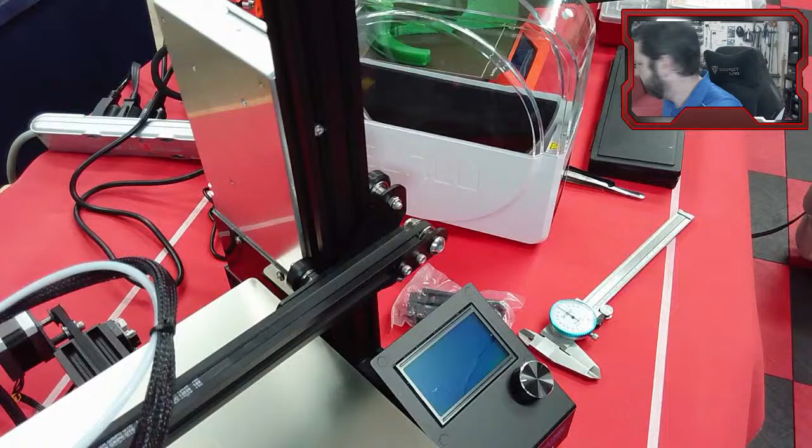So let's back up a little bit, get that off the screen. Here's the violin. So I've put some fasteners in it, put a few pieces together. Still have another piece to print. Actually, there's two other pieces to print to it. We did have a part failure in the print. I saved it. Well, I don't know that I've saved it yet, but I glued it back together. So this piece right here, it starts here and it actually ends here. So all of that is printed as one piece.

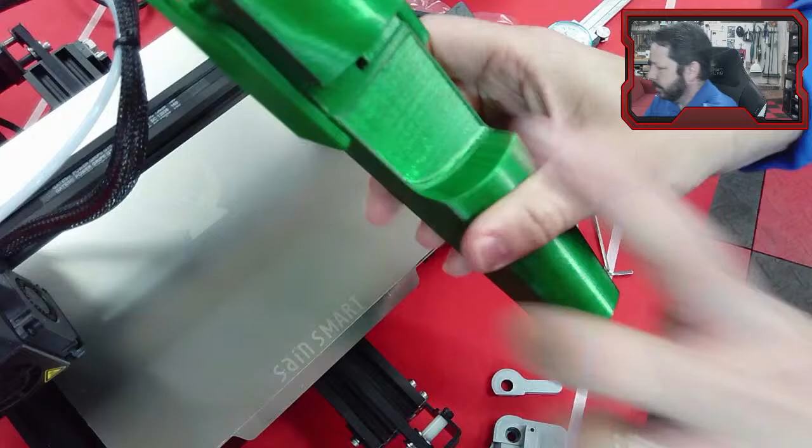The problem with this comes from the way I printed it. I printed it standing on this end, upright like this. On some printers that would have been no big deal, but on the ones I printed on, the bed that it's standing on moves back and forth to create the y-axis. Other printers, all of that motion X and Y is handled by moving the print head back and forth, and the bed just drops down to create the z-axis. So that's a different mechanism altogether.

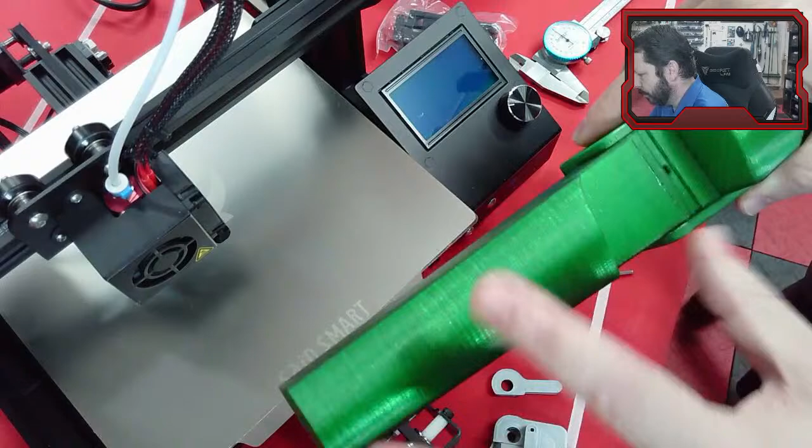But when you put a really tall, relatively heavy part, these aren't light, they have 4 walls and I think only 20%, but they end up relatively heavy. When you print that standing on its end, as this bed moves back and forth, that column gets taller and taller. And it starts shaking a little bit at the top, and eventually you'll get the nozzle catch on something that it printed. So here it actually caught on, it's buried inside here right now, but there's one of these slots where you put a nut. I'll show you that later on today.

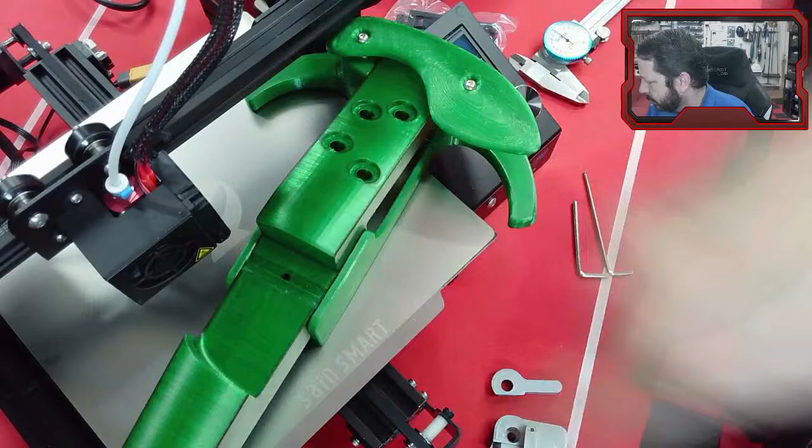Where you put a nut in here to bolt things together, it caught on the edge of making the roof of one of these things, and it was just enough to break the whole thing off. It just landed on the bed while the extruder tried to print the rest in midair, so it didn't work. What I did to fix that, well, we'll see if it fixes it. I may have to reprint the whole part, but there are screws that hold it together this way, and it's screwed down to this bottom plate, so maybe it's good enough. It's going to be in compression when we put the strings on it. The strings are going to try to pull everything together. So I'm actually more worried about bending on the back side, but we'll see.

Anyway, what I did is I reprinted just this top part, the part that tried to print in midair. The whole thing was a 12-hour print, so I didn't want to start it all over again. And then I glued it back together. You can see the seam right there. I didn't try to hide the seam because I don't know that it's going to work. If it does work, then I'll come back and try to sand this out and smooth it up a little bit. But how you can do this, I think I already showed it, in Prusa Slicer you can actually split a part into two or multiple pieces.

In this case, I was just splitting it into the part I'd already printed and the part I hadn't printed. So what I did is I resliced the part, and in this case I had a really good marker because it failed right at the top of one of these little holes where the captured nuts go.

And so I could find that layer in the slice, and it gives me a layer number, 798 or whatever it was. And I just sliced the part at that layer and was left with this little piece and the piece I'd already printed. And I just threw away that part and printed this part and then glued them together.

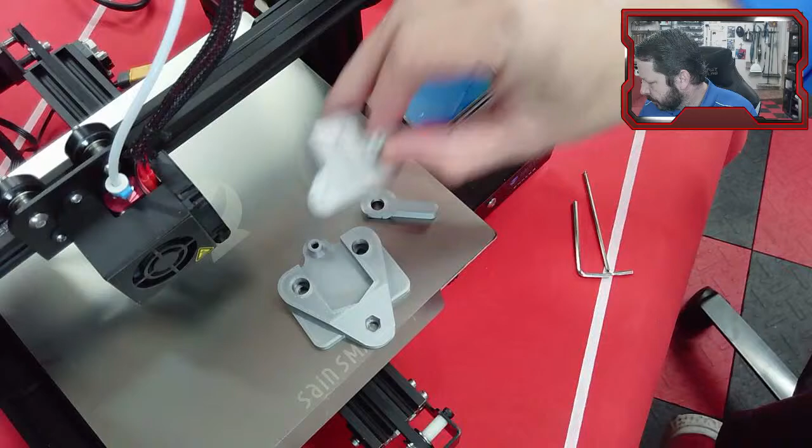This is a swappable carriage, so I'll have to take this part off and it'll mount in that place. This is the plate that puts the hot end and the fan shroud and all that on here, and it'll mount there, and there's a little lever here. I need to show you something about this one because it's not quite right yet, but this little lever cams over and locks it in place, and then you can print, or you can switch other things out here.

So I'm going to put one of these plates with the right shape in here, but it'll mount a pen so that you can have a plotter, and another one where it can mount a little tiny DC motor for very light CNC milling type stuff.

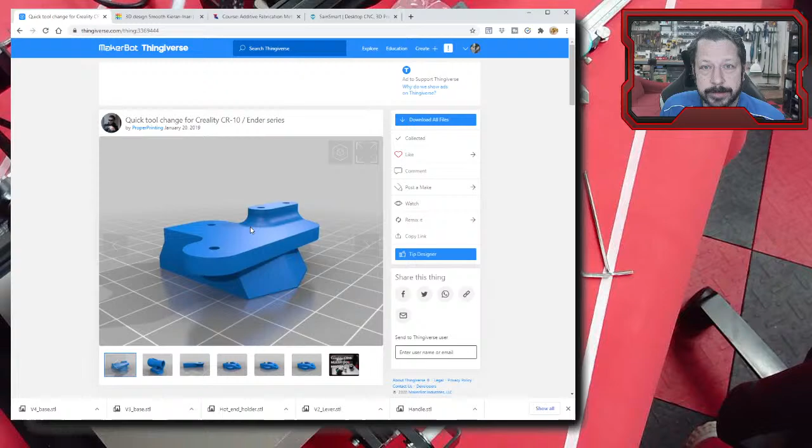I'll show you where I got this one. This one is from Thingiverse, but you can get it other places. This is it right here from Proper Printing. He has a YouTube channel where he does all kinds of stuff. He made an Ender 3, but it's foldable, so it folds down into a little briefcase looking thing. And he's got a lot of different interesting things, but this is where the design came from.

I have one on another printer, and they work surprisingly well. Even PLA, you'd think that PLA being that close to the hot end would not survive, but it's actually not close to the hot part of the hot end, so it actually works okay. But he's got several different pieces.

There's the main plate. There it is with a Dremel-like tool on it. Just different prints of it. He's got a laser mount. Oh, I have one of these lasers. I might could mount a little laser on there too. Didn't really think about that. But there it is in place back there in the back, the white piece.

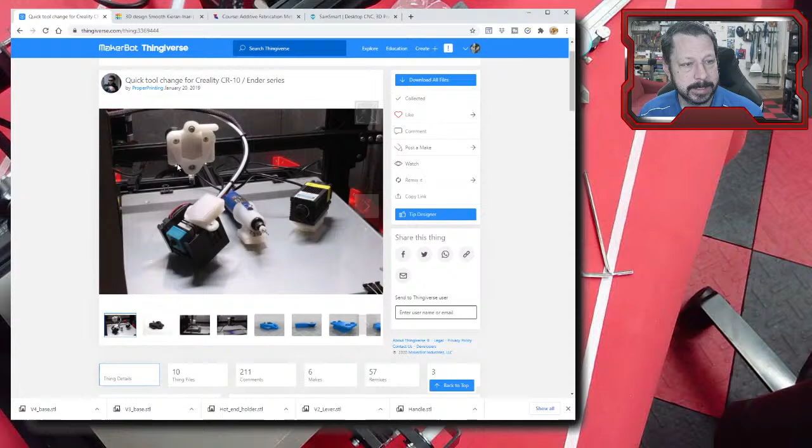So it's going to offset this thing a little bit, so I have to reset where the y-axis home's at. But that's just a matter of moving the little limit switch back here to reset where 0 is on the Y corner. What I was going to show you about this lever is that it doesn't work quite correctly, and it's because of the way I printed it.

So the idea would be that it would go this way. It would cam over, and I don't want to do it right now because I don't have the screw in here to actually help out holding this thing, and so I'm pretty sure it would just shear this little stem off of here if I cammed it over. But what the problem is, and I don't know if you'll even be able to see. Let's see if we can get it to focus on this part. Maybe it's going to focus on everything but that part because it's so tiny.

It was printed on the bed this way, and right at the bottom here, you can see that it's a little bit thicker here than where the main part of this cam exists. That's usually called elephant's foot, where the bottom of a print is a little bit wider than it should be. When you're printing those first few layers, you're printing usually slower, maybe even hotter. Your layer cooling fan for PLA is not on, so it's a little bit gooier, because you do want it to stick to the bed.

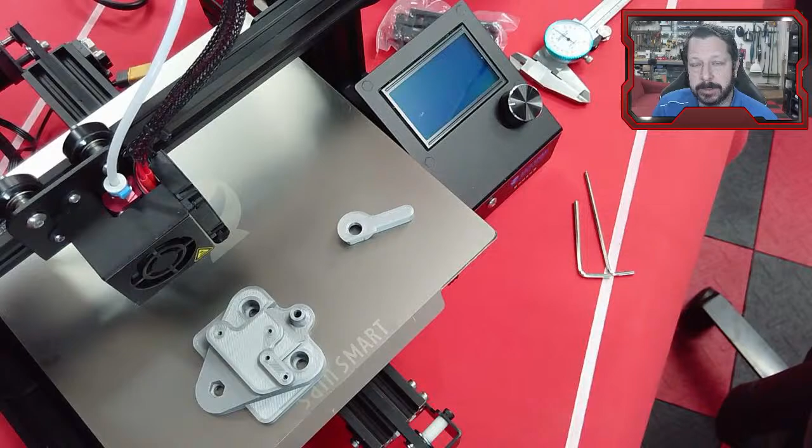I don't know if he's released the files to modify these things. No, he does have one file that you can modify. You can modify STL files, but it's not as easy because an STL file is all the geometry just described in triangles. So it's not like a SolidWorks file where you have all of this information about this was created by an extrude, or this was an actual arc. It's just triangles that make up the outer surface. So they're a little bit harder to modify.

Another thing you can do is in the slicer itself. So there's a thing called horizontal expansion.

And so if the holes are coming out too small or too big or whatever, you can modify this horizontal expansion to make holes larger or smaller; that's usually what you're doing with that. But there's also a horizontal expansion for the first layer. So you can just shrink down that first layer by 1% or however much you think you need to shrink it down by.

I think that's what I'm going to try when I reprint this, in order to get that elephant's foot gone. Of course, you could just go in there and try to file it down, sand it down to where it fits. I might try that too. Another thing I could do is try printing it this way, where the elephant's foot is on this surface, which would be much easier for me to file if it gets in the way. I actually don't think it would get in the way.

But those are things that you have to take into account when you're printing something: when it becomes a real thing, it exists in the world, the way you created it might affect how it actually works. In this case, it makes it not work. What else do I want to show?

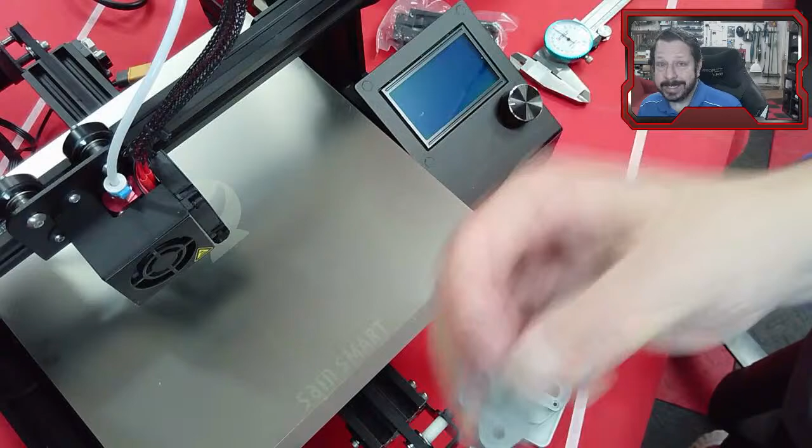Now, if you're printing something that doesn't have these tiny little peaks, then okay, no sense in worrying about it, if all you're printing is bigger areas like this. I did go in the G-code itself to see if the retraction was changing, and it does show a change in the retraction in the code itself for these files, but the results don't show any difference at all. With these, I can clearly see a change when I modify a variable.

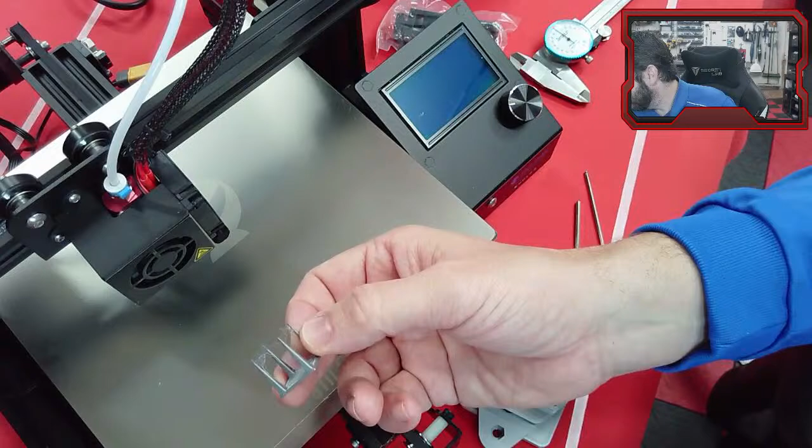So I kind of still like these, even though you can really only test one thing at a time. But I don't know, I still kind of like these so far.

Maybe I'll find a reason that I'll like these, but right now I still like these. As far as when you're doing this for an assignment, it doesn't matter what you do. Just do something, print one, make a change, print another one, and report that, hey, I changed this and this happened. So it doesn't matter which one you use, although I do kind of like the smaller one for actually visually seeing that something's changing.

What else? Oh, all right. Now a lot of your printers, if you have the Pros or the version 2s, they have a little piece of hardware here that lets you tension this belt easier. So the way that this printer tensions this belt is you loosen these and you pry this over and tighten them back down. And there can even be a similar thing on this axis also, where you loosen these and pull it out, and that's how you tighten the belt.

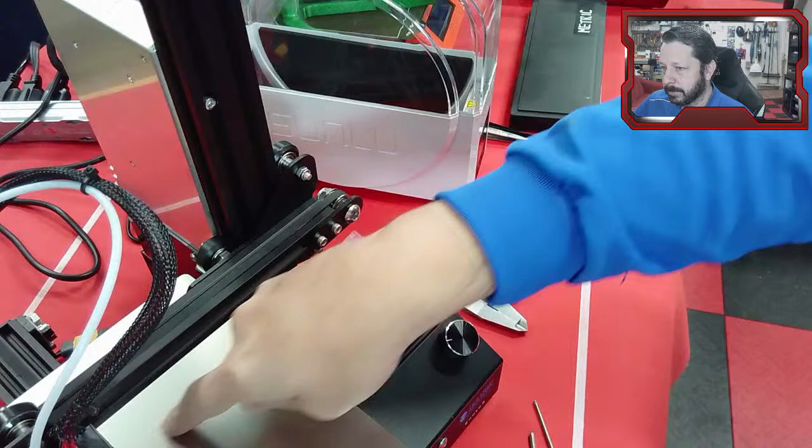Now this belt's actually pretty tight. But when I ordered this sheet, the PEI bed sheet here, right there, when I ordered that, I also ordered a little end here that is adjustable. So these came from Sainsmart. No particular reason I ordered from there, except I was already ordering other things from there. So they do have accessories, and let's see if I can find them in here. I've ordered some of these other things too that we'll look at in the future.

It looks like they have their own version of the filament drying box. Oh, I will mention something about this one. This box, it does seem to work. I did try to get a bad roll of filament so that I could dry it out and see if it worked. The way it works is basically there's a heater in here that acts like a really low temp oven to evaporate out the moisture, which is the same thing that you do a lot of times in a food dehydrator or in a toaster or something like that. They've just built it into this.

The issue I had with it is I did have an old roll of filament, but it's an old roll that I don't even know if they make this style spool anymore, but it's a really wide spool. So it's not this spool, but it's really wide, and it doesn't fit in the little cavity here. So that's the only issue I've had with this particular thing, is that I do have some spools of filament that don't fit in there. I don't even know if they really make that form factor anymore, but if for some reason you're using a spool of filament that's excessively wide, it's not going to fit in the box to even begin to dry.

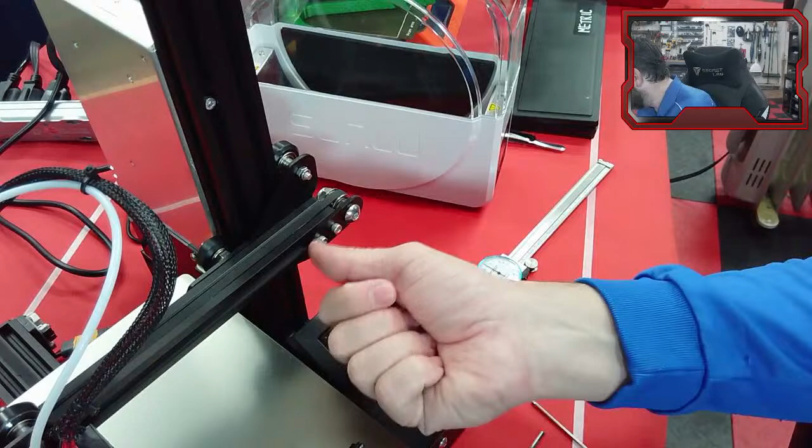Anyway, this thing, I wanted to show you, if you have a printer that doesn't have this, for $13, you can mount this little guy on here. And it does come with hardware, although there's hardware here, so I don't know if you would need to change out the hardware or not. It actually looks like you could just use what was already there.

If you don't want to buy anything and you have filament, you can print these. For most printers that have this size, the 20 by 20 extruded aluminum, on Thingiverse they have printable versions of this, screw and everything. You just use the old hardware that was on the old piece, put it on the printed version, and then you have a little knob here that you can use to tension the belt. For both axes, they have those for most printers. I haven't actually printed one of those, but you could do that.

So what you would do, hopefully it's not too terribly difficult. So we loosen it up. Got to get the belt off of here. I do remember it being a little bit tricky to get this belt on here, but there we go. Now, this one, the belt could just come around here. This one, I actually have to feed the belt in here. Also, this one has a grooved pulley versus this one just had two bearings back to back. So I don't know if that will help us keep the belt. We didn't really have slipping problems on this to begin with, but now we certainly won't, at least not there.

So let's see if we can get this. Okay, it's going to mount that way. Let's see, what hardware do we want to use? I'd rather just use the hardware that came on it, but it is a little bit thicker plate, so I'm going to use the hardware that came with the belt tensioner. This is always a tricky part, getting these. It might be simpler to do this. Put them on and then slide them in there. I keep forgetting that I don't know where the camera's looking all the time. So there's that. Where'd my other one go?

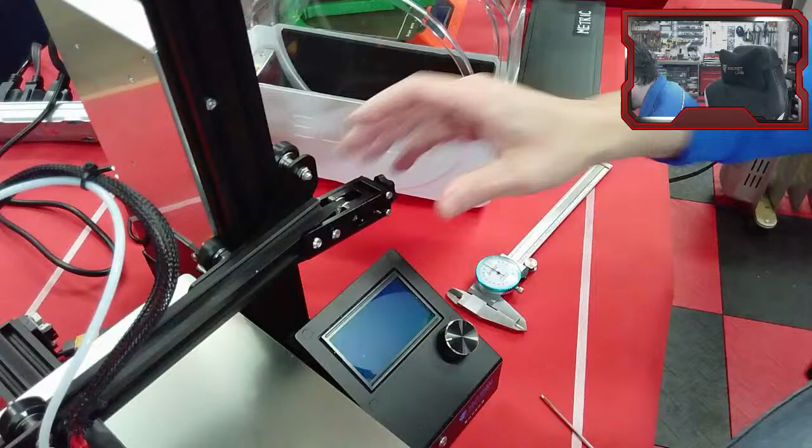Now these little inserts, you can tighten them up and they don't actually catch. So you do have to be careful that they catch in the groove there and they don't end up tightened where they will just slide out. So I generally try to spin it pretty fast to get them to swing up there in place, which they did. So far this has been pretty easy, ooh, look at that. Don't need to get that out of whack.

All right, and then we can just tighten the belt by turning this knob here until it's the tension we want. If this belt is loose, then in your prints you'll have blobs when it's in the slack position. It won't move, and so it'll think it's moving. Again, none of these printers have any real feedback on them. There are a couple of accessories that you can add to a stepper to count its steps. Did it actually take the steps you told it to take?

I tried to buy one, but you have to have a particular motherboard so that you can plug these things into, and I don't have one of those motherboards right now. So if I get a motherboard that has socketed drivers, I'll put one of those on one of the printers so that you can see what it does.

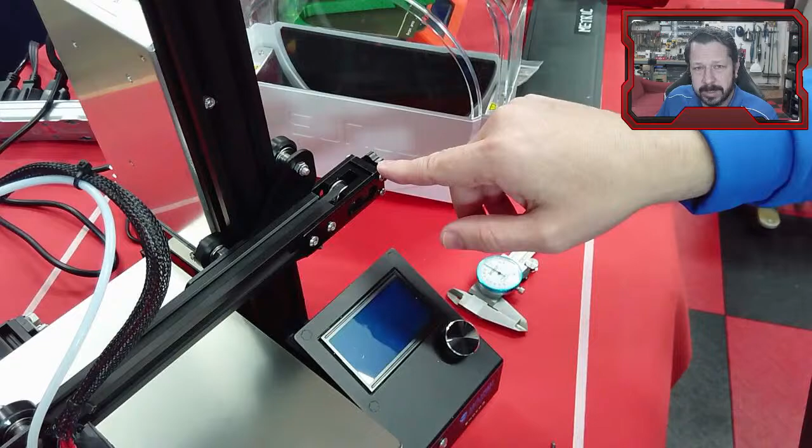Looks like we're back, and this is really simple to use. You can probably over tighten these now because it's so simple to do, but in general you don't want these to flop around. You want them to be very resilient. You push them and they come right back. You don't want any flopping at all. So that's actually a really simple upgrade if you don't have one of these already, and it's not terribly expensive, and you can print them yourself.

So on Thingiverse, let's see if we can find one real quick. Belt tensioner. Thingiverse is always kind of slow, so it'll eventually catch up, I think. Yeah, here's one for the Ender 3 belt tensioner. That one you can kind of see. I think it might have both of them in here. This is for the y-axis though.

Wow. Well, you get the idea. I don't know if I want to wait for this thing to load. Like I said, Thingiverse can be really slow, but here's several different designs. This one I've seen before, and it seems like a really good one. It's pretty simple also. But they do the same thing. This is really simple right here.

If you don't have a way to tension the belt that you have, you don't have one of these, you've tried pulling this out and you just can't do it, and you need something quick. This thing just goes and it clips on the belt. So if you have a spot in the belt, maybe on the bottom down here or somewhere where it's not going to go around a pulley, then this little S shape will add just a little bit of tension to the belt. Some of your printers actually ship with these. They look like the middle part of a clothespin that's spread out.

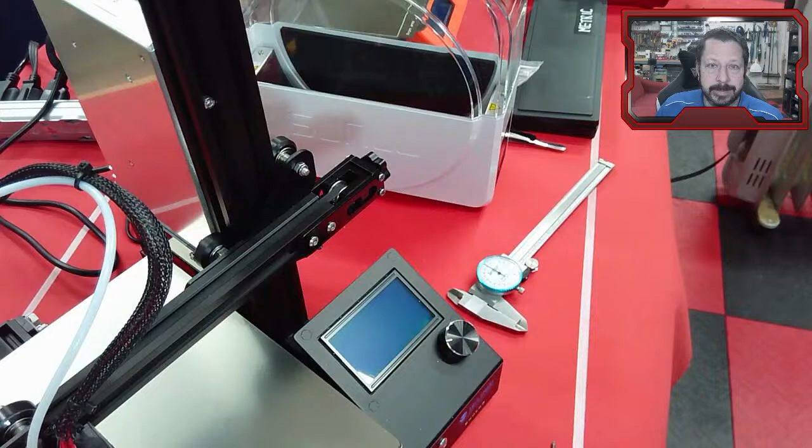You print it at 200 degrees Celsius or somewhere around there, so that seems really high, but PLA softens way lower than that, like, I don't know, 70 degrees Celsius. So now you're getting into the range of temperatures that on a hot day inside a car or something like that might be enough to soften it up. It won't melt it, but it'll be enough to soften it where it deforms.

PLA is also really hard to finish if you're trying to sand it or do anything like that with it. It doesn't sand well, and if you use an electric tool of some sort, like a Dremel, you can actually melt it, because the speeds you're sanding or grinding at generate enough friction to heat it beyond its glass transition temperature, and it's going to get soft and melt and make a big mess.

So PLA is a good part material to test things out with, or to make things that are going to stay indoors, not exposed to temperature, or where you don't have to do a whole lot of sanding to make them look nice. It's good for that. But there are other materials these printers can print that are going to be better if you're designing this thing for a function.

One of those materials is PETG, the green stuff, though it's not all green. I have a roll of green stuff that we're printing the violin from. It's a good in-between; you don't really need a printer that's enclosed. Some materials that are better functionally than PLA have to be printed in an enclosed chamber. PETG does not. It is a little tricky to get your printer dialed in on the right speeds and temperatures to print it at.

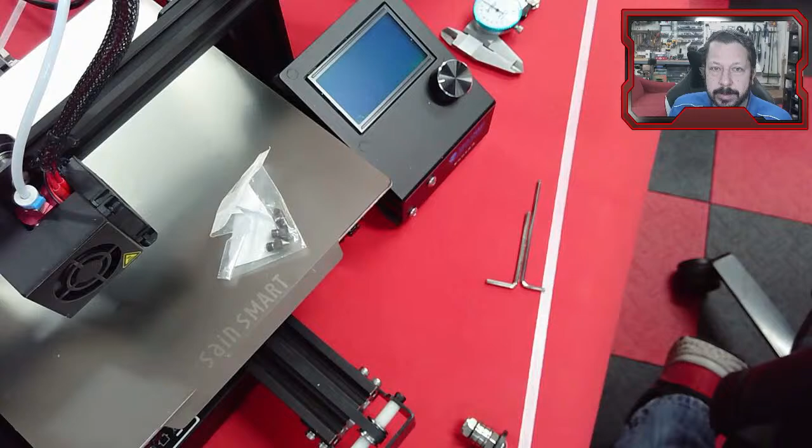The nozzle that's on your printer by default down here is brass, and that's fine for PLA, ABS, even PETG is fine for all of those. But if you start doing any like glow in the dark or wood fill or copper fill or any of these materials that have another thing inside them, it's going to be abrasive.

Even glow in the dark is abrasive to the brass nozzle, and it will not last very long, maybe half a roll of printing for some of these materials. Some of these materials, even less than that, you can't do it any amount of time before it's worn a hole larger than the nozzle started with. So you have to switch out for something like this, which is a hardened steel.

If you're doing a lot of abrasive printing, they even make nozzles that have a ruby on them. I don't know if it's steel or brass, but the actual core of it is ruby. So that's if you're very serious about printing abrasive materials. I don't have one of those. These are a few dollars for a nozzle. The ruby ones are like $80 or $90 for one nozzle. And I don't print anything that needs that kind of nozzle.

Some materials need to be really hot. So nylons and polycarbonates and PEEK and all these materials that you may want their properties, these printers by default aren't going to print in that, just because the hot end can't reach the temperatures it needs to reach in order to print them. All right, so you pick your material. I'm going to say that if you're trying to build a functional part, the most accessible material for an Ender 3 style printer is going to be PETG.

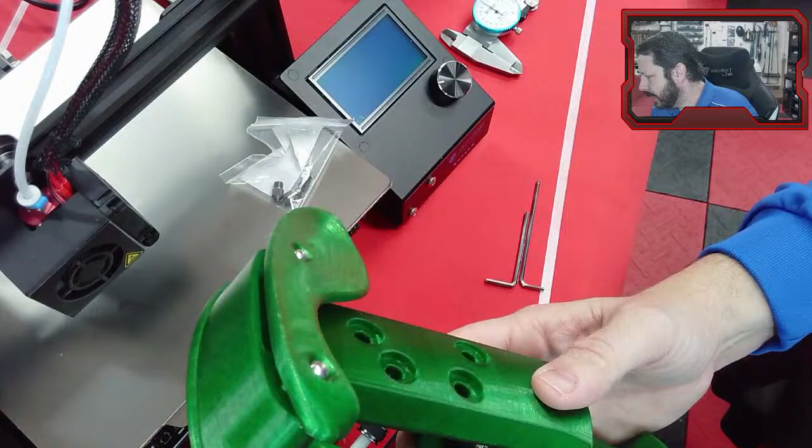Obviously, some things to do before you get into printing. You want to design a part for printing, then you need to think about your printer being calibrated. We've actually gone through that already, so I don't know that we need to talk about that too much. You need to figure out how you are going to attach parts together. So this violin has nuts and bolts, and they have done a couple of different techniques here.

PLA wouldn't work for vacuum forming. If you tried it for vacuum forming, I would certainly use many walls and many top layers and a pretty dense infill, because first of all, it can't deform, or else your vacuum form will be deformed also. So you don't want it to deform under the heat or the pressure. There's actually a decent amount of pressure with vacuum form parts that the form has to undergo.

So I would use several walls, maybe 4 walls, and a higher infill, maybe in the 30-35% range, something like that, because it does have to hold up. But I have vacuum formed with PETG before, and it worked okay. I haven't vacuum formed recently with PLA. I did try one time, and the mold cracked, but I didn't do it with that many walls. That was answering a question on the chat.

So let's talk a little bit about how you might attach things together here. They've got a couple of different methods. One, they've just built some hex holes that you can drop a hex nut into. I don't know if I can get it lined up, yeah, it's down in there, kind of like that. It's down in that hole. And so you can just drop the nut in there and then screw a machine screw from the other side, and it's going to pull these together.

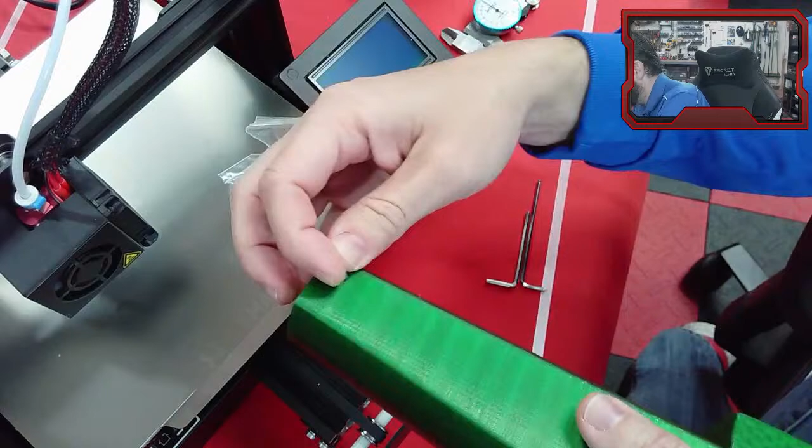They've also used this kind of process, let's get a nut out. These are M4 size, not that that matters. So you put the nut in here, which is going to be hard for me to do and hold all this stuff. I haven't cleaned this hole out yet, so it's not going to be quite the right size. So you push the nut in there, and then there's another part that bolts underneath here, and then you can bolt through here. So this one is sort of captured in the sense that the nut is placed later. You can do this same thing.

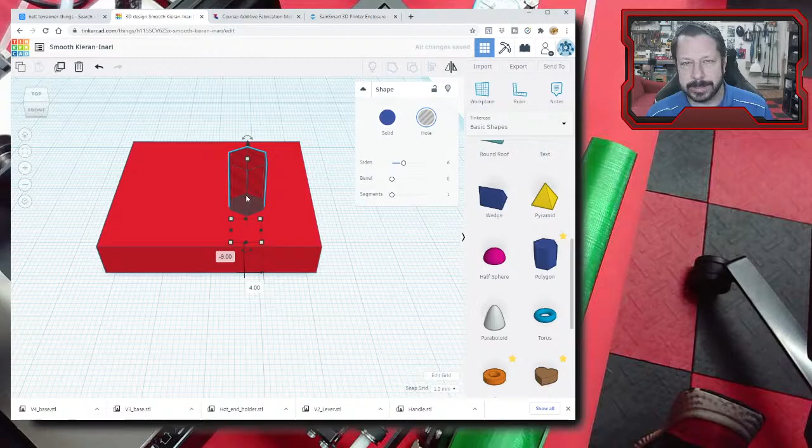This violin doesn't have it. Let's go to TinkerCad and I'll show you. So you can build a part, and TinkerCad has a polygon. The M4 across the flats is I think 7 millimeters, and across the points I think I had it at 8 millimeters, something like that. So this is a hole that's a little bit bigger than the M4 nut, and you cut this part into here. Let's select everything, join them together, and there's the hole.

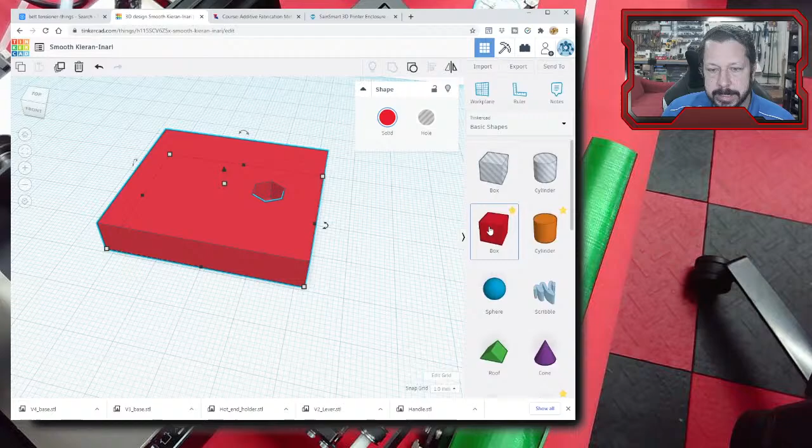And you can print up to this far and do that same thing that we did with the filament change. So make the printer pause, basically. Insert some G-code or click the button in Cura that says pause at layer. You find this layer, drop the nut in the cavity here, and then continue printing the part on top of this. You don't actually make them in two different parts, but I needed to show you the hole inside there.

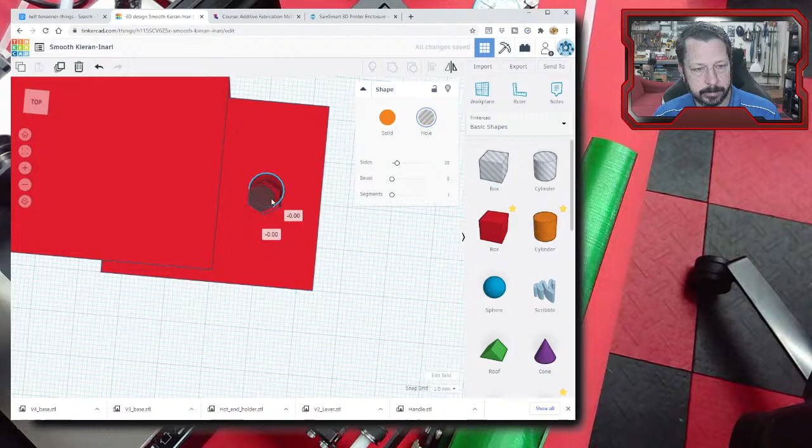So here's our block, and then we would also need to put a hole for the screw to go in. I don't know the right size, we'll just pretend. Let's do something like that. It should be round. We can fiddle with it all day to get it lined up right. In a modeling package, you would just do this, so you wouldn't have to worry about this particular part of it. I've already cut that hole out, so let's just put them together. I didn't line everything up, but that's fine.

That's not the point. So now you print this bottom part until it gets to the top of where the captured hex nut is going to go. You leave it on the printer and cause the printer to pause. You physically go and drop the nut into the hole. At that point you're halfway through the print, and then you print over the top of it. Embedded inside your print is that nut. That's kind of nice in that all the hardware is in there.

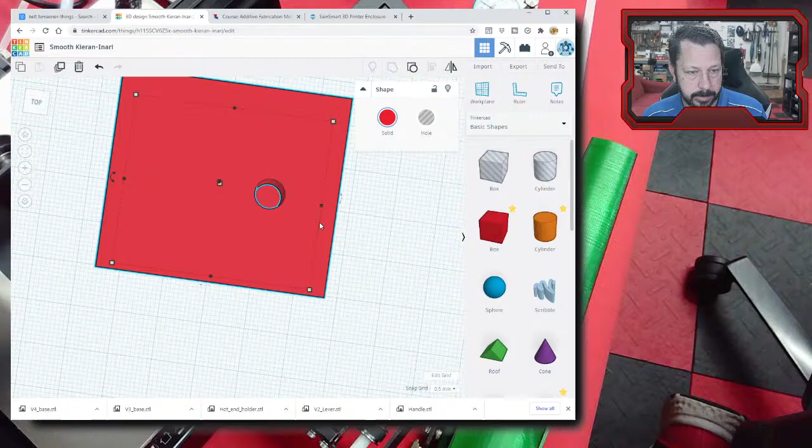A downside to this is that if that nut ever breaks free, let's see if I can get this part off again, if it rounds out the holes that are holding it in place, there's nothing really you can do about it because it's built inside the part you've printed. So that's why you see this same idea a lot, but more like this, where I can actually get to the nut if I need to take it apart. There's another way you can do this that uses these things.

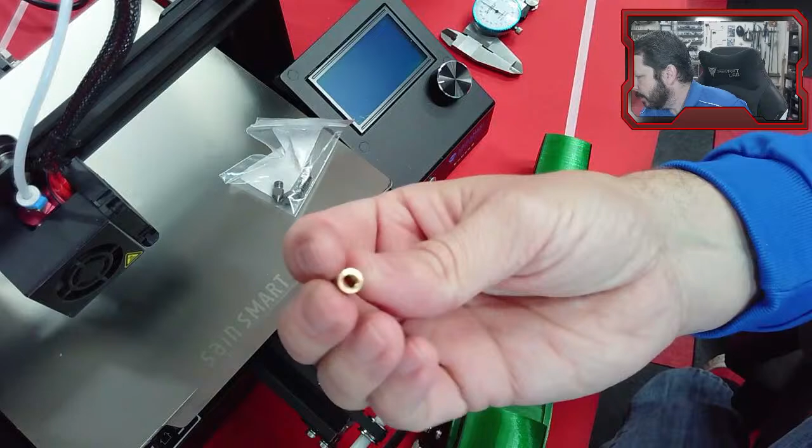So these are heat-set nut inserts, or heat-set inserts, or whatever you want to call them, threaded inserts. These are brass. They have actual machine threads inside here and these little ridges around them. So what you do with these is you create a hole, you know, the right size hole in your part, maybe like this,

Oh, can't hit the keys. So there's a hole. Oh, there's a hole.

Create the right size hole, slightly smaller than the diameter of this thing, right? So you want to have a little bit for this to bite into. And these don't just press in. You actually use a tool like a soldering iron, you can use a soldering iron, in fact. And you insert them, you heat them up and push them into that hole.

Again, they have a little bit of the same issue that the hex nut has, in that if they ever break loose, they're just stuck there. It's hard to replace them, depending on where they are in your design, I guess. But that way, you do get actual metal threads in the part.

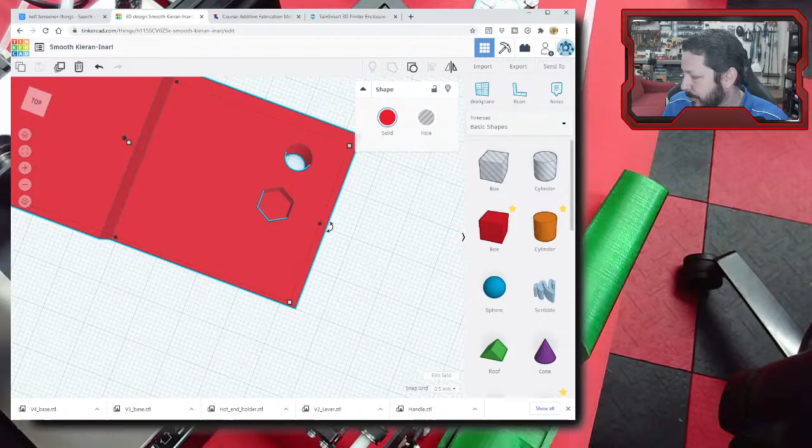But much lower than the printing temperature is the glass transition temperature. So if you can find that piece of information, that'll tell you if the material is going to be able to withstand the heat that you expect it to have to deal with. And I don't know if PLA Plus changes the glass transition temperature or if it just makes the part tougher, because I don't really know what they've done to the PLA to make it plus. So I just don't know.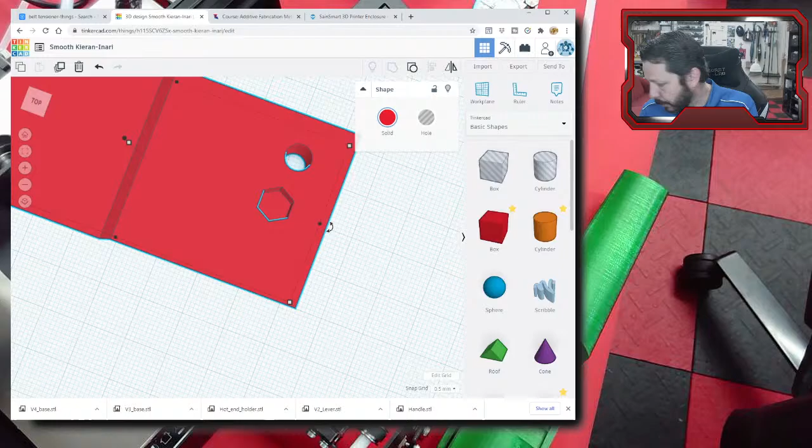Let's see. So here are some guidelines for things to think about when you're designing for printing. Holes in the part. Like this hole goes all the way through this piece here, and then through the other piece that's going to go on the end, so that a tube or a rod or some kind of stiffener can go through all of that and keep the neck more or less straight when you put the string tension on it.

So it's hard probably for you to see in here, but I'll try to make it focus on it. Yeah, it's just not going to. But anyway, I printed this with 4 walls, and I printed it standing up. Remember, we had the problem with this piece because I printed it standing up.

But I printed it standing up on purpose because I have a lot more confidence that I can draw circles in the XY plane on this printer than if I were to lay it down flat and create this same hole, all the way the length of here, by stacking layers on top of each other this way.

But this way, I'm stacking circles on top of circles, not rectangles to make circles, if that makes sense. And so part orientation of how you're going to print the thing does matter, particularly for features that need to maintain a certain size, like the diameter of this hole.

I also printed it with 4 walls because it's going to need to have enough strength to actually do it. If I just put 1 wall in there and that wall is surrounded by the coarse infill, then it's going to be really easy for that infill to crush all around it. So if you're printing holes and bosses and features that need to have some strength to them, instead of just printing the thing solid, just print with more walls.

And usually 4 walls is a good number of walls that you've gotten most of the strength out of it without making it just completely solid. And then your infill can be 20% or something like that. You can, if you need to, print completely solid. There was something I was printing the other day that I just made completely solid. I don't remember what it is now.

Oh, the flute. I made it completely solid because I didn't want any air trapped inside, or I wanted minimal air trapped inside the walls of the flute. And the ocarina, I guess I never showed you the ocarina. I printed it completely solid.

But as far as function goes, making a part that can withstand some kind of stress, try to do a couple more walls than you would normally do. 4 is good. Try to orient the part so that the features that need to maintain their shape, circles in particular are bad about this, are printed parallel to your axis. At least on this printer.

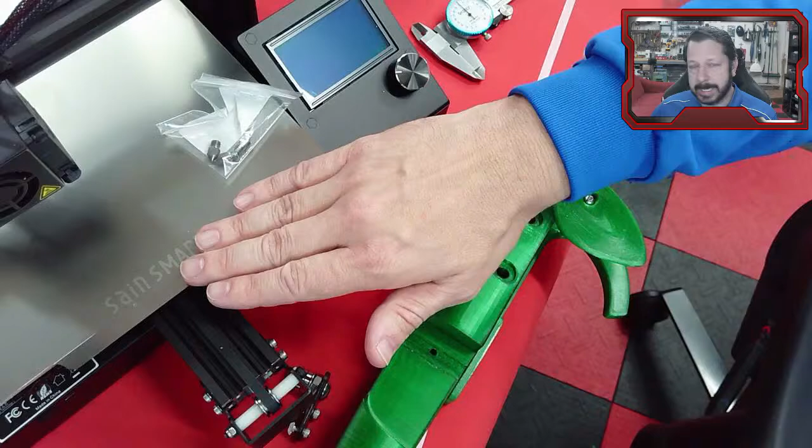Other printers might have some different motion, but on most consumer-level printers, the X and Y direction is going to be a better plane to print circles and squares that need to remain square and things like that. Let's see. We talked about using the horizontal expansion.

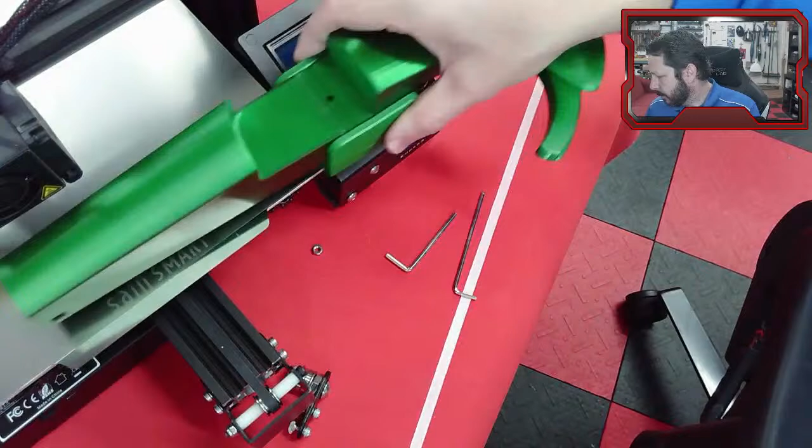If you don't really know ahead of time, this is something you have to calibrate for. If you need to print this way and you need to print circles and holes going into the part, then it can be that the holes are always undersized or always oversized. Now, it is much better for them to be undersized with 4 walls, and you can come back and ream them to the specific shape you need.

So reaming is sort of like drilling, but it's a particular tool called a reamer that is a precision device for making an exactly sized hole. Probably overkill for 3D printed parts, but if it's necessary, then you can do that. So it's better that they're undersized so that you can always remove material later in some kind of machining process.

But if you need to adjust that and you don't want to go into changing the number of steps per millimeter for your X and Y axis, we did that for the extruder, the E steps, but those kind of steps exist for X, Y and Z also. If you don't want to do that, then in most slicers there is that horizontal expansion. I think in some it's a percent, in some it's an actual millimeter number. And you can make things bigger in general or smaller in general.

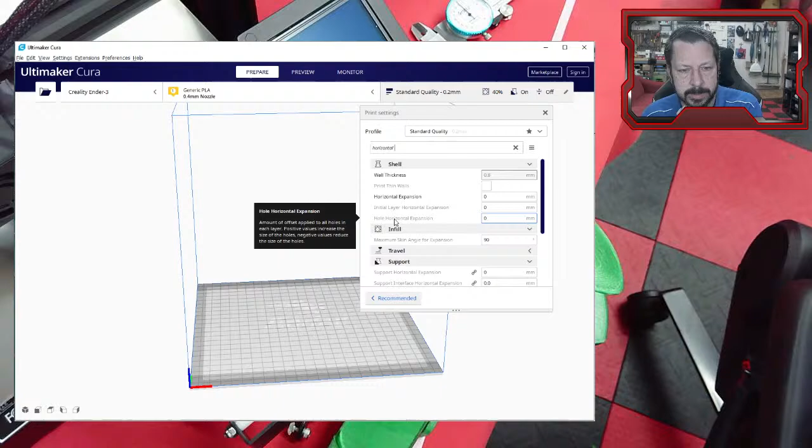So those 3 settings. You would print basically a flat sheet with a bunch of shapes inside of it and measure those shapes. Maybe I'll make one of those up shortly. Not today, but I'm sure there's some that exist. But you make these to create holes of a certain size, and then you measure them after they've printed, and you adjust the expansion numbers here so that you can create the exact dimension you want, if you don't want to go in and try to tune your printer itself to create the right size holes.

All right, so let's see. What else might we do? Walls, I talked about that. If you're using fasteners, you're better off using 4 walls. If you're not using fasteners like nuts and bolts that have to go into holes and things like that, then 2 walls are probably fine.

But in general, the easiest way to gain strength on your part that you're printing is just to go up to 4 walls. And you can also increase the top and bottom layers a little bit. I think the default is usually at 3. And you can create maybe 4 top and bottom layers.

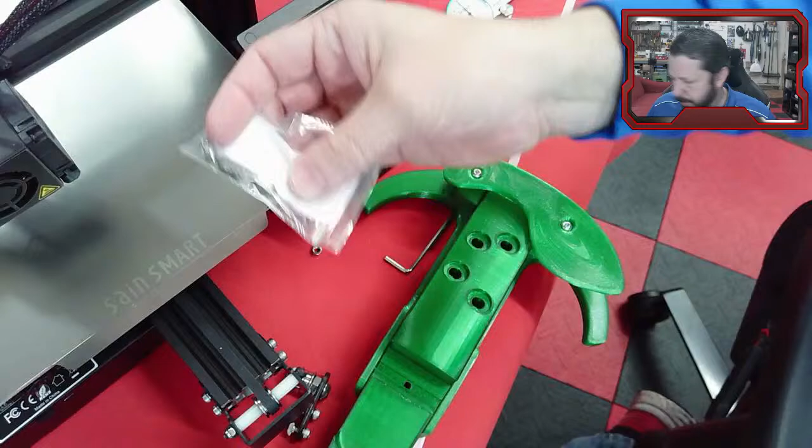Another thing to think about when you're thinking about the walls is, when you build the part to begin with, try to anticipate that I'm going to print this part on a printer that has a nozzle in it, and that nozzle diameter, the diameter of the little hole in the end, is whatever it is. So 0.4 millimeters is kind of the standard, but there are others. You can order, and probably around here somewhere I have a whole set of different nozzle diameters. There are reasons you might want to go larger or smaller.

Larger nozzle diameter, obviously you can print faster because you can squirt out more material. Smaller, you're going to print slower, but now the little stream of molten plastic that's coming out of the nozzle is thinner, and so you can get higher detail out of that. So you could change a fundamental thing about your printer pretty easily just by changing out the nozzle.

If you do go to change the nozzle, there are a couple of things to be aware of. One of them is, like my printer's sitting here cold, don't just go cold and try to unscrew this thing, because there's a really good chance that brass nozzle has seized in the block that it's in. It's in an aluminum block usually, the heater block itself. And there's a really good chance that you will shear the threads, or you just shear the entire nozzle in half, and then you've got to figure out a new hot end.

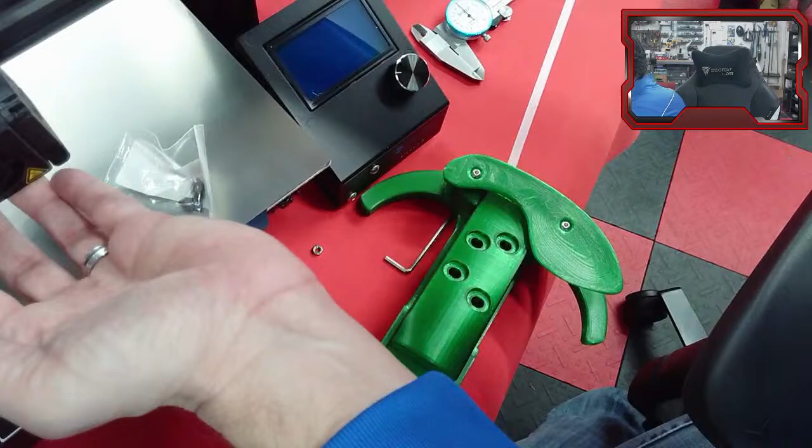So heat it up. It doesn't have to be all the way to printing temperature, but heat it up and then unscrew it. And when you're doing this, I don't know if I can get a good position where you can see this or not. Let's see if we can. I don't know if we're going to be able to see down in there, but let's see. Maybe, sort of.

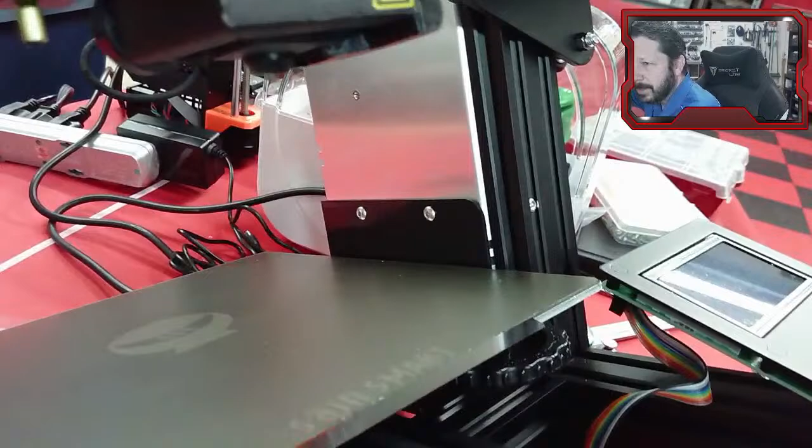Well, this one again has the little silicone pad around it, but when you're unscrewing the nozzle, get a tool, pliers, a wrench, whatever, and hold the block also. If you don't, then maybe you don't break the nozzle, but you break the heat break. There's a little thin tube that connects the colder side of the hot end to the hot side of it, and that's called the heat break. We'll look at all these parts later on when we take it all apart, but try to hold the block and unscrew the nozzle after you've heated it up, and then reverse all of that to put it back together.

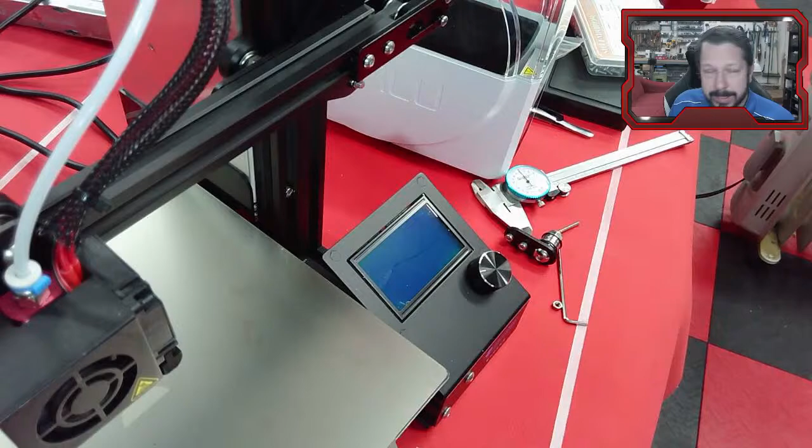Actually, when you put it back together, heat it up and turn it maybe a quarter turn to really seat it in there. You can reassemble it cold, but don't leave it that way. Heat it back up and make an extra quarter turn or so. Otherwise, the filament's going to leak out past the threads. It's not going to seat in there very well.

So we'll take this all apart later so you can see all the pieces, and I'll go over that again. But don't just think you can unscrew the nozzle and screw it back in and everything's going to be fine. If you just do that without knowing what you're doing, there's a good chance you're going to break parts in here, or you're going to get it back together and it's going to leak everywhere. So just make sure you know what you're doing when you go to change out nozzles, if you do that.

All of that to say, these things come in different diameters. So when you're designing your part, make sure that you design it with features that fit that diameter of nozzle. So if you know you're going to print it on a printer that has a 0.4 millimeter nozzle, don't make walls that are 0.6 millimeters, because what's it going to print? It's going to print one wall, and then it's got 0.2 millimeters that it couldn't figure out how to print.

So there is the print thin wall feature in Cura, so it'll do something, but it's probably not going to be able to produce a 0.6 millimeter wall if you have a 0.4 millimeter nozzle. So make that wall 0.8 millimeters in your design if you really need something that thin, but make it 0.8 so that it can print two 0.4 millimeter walls side by side.

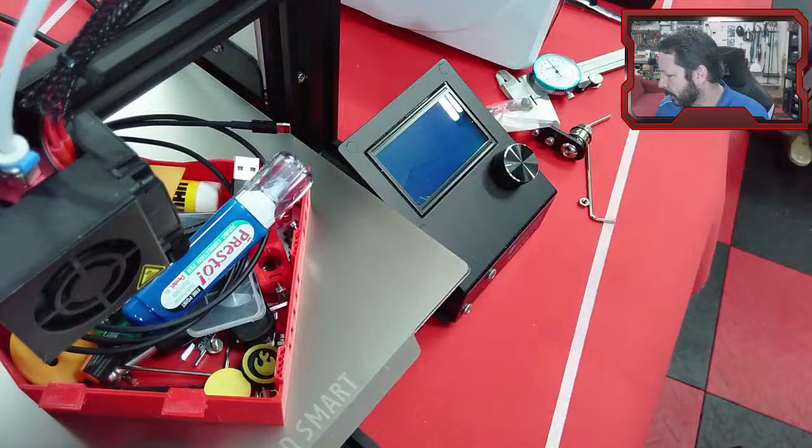And if your printer has difficulty sticking down to the bed, then there are a couple of things you can do. These thin walls, a lot of times they want to warp, they want to peel up. You can add, this one doesn't add it, but you can add thickness to them. You can kind of see there's a little bit of thicker part. You can add ribs in there.

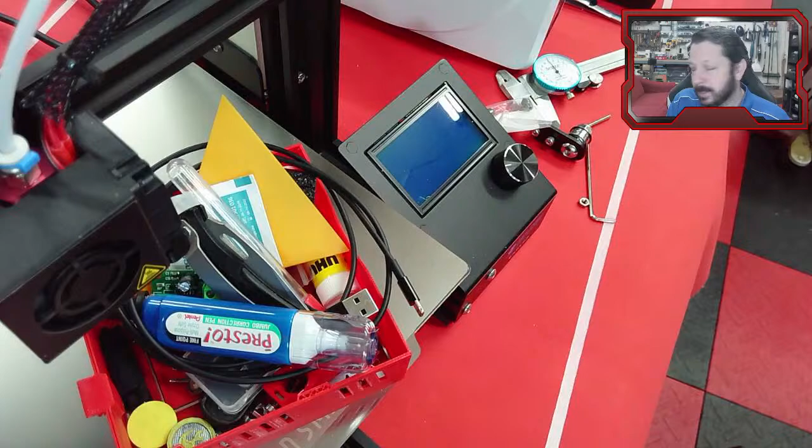These are all kind of the same type of things that if you were designing this part to be injection molded, you would think about, because it's a similar process. You're melting material and then extruding it or injecting it, and then it's got to cool, and it's that cooling part where most plastics, as they cool, are going to want to warp. So you can add features.

Maybe if you know that this corner is really bad about warping on your prints, build a little feature into the base down here that you're going to erase later. You want to cut it off or trim it off later after it's printed. But the whole point of that feature is to hold that corner down. So I'm thinking of something just like a circle around here.

In fact, some slicers have that. I don't know if Cura still does or not. Let's see, I don't see it right now. It used to be that Cura had some little helper blobs, like they were just little discs that you could add to corners inside Cura. I don't see that right now in here, but maybe it's still there somewhere. I'd have to look it up. But if you know that that's going to be an issue on your part, build them in from the beginning.

If you know you're going to need support material, so like this, I didn't want to print this with support, and so these little overhangs here, they're kind of jaggedy. So either build in the supports to the part as part of the design, or make sure that your angles here, instead of, I'll draw the picture here. So let's see, which way is the right side up? That way. So instead of, this is the front view, I guess.

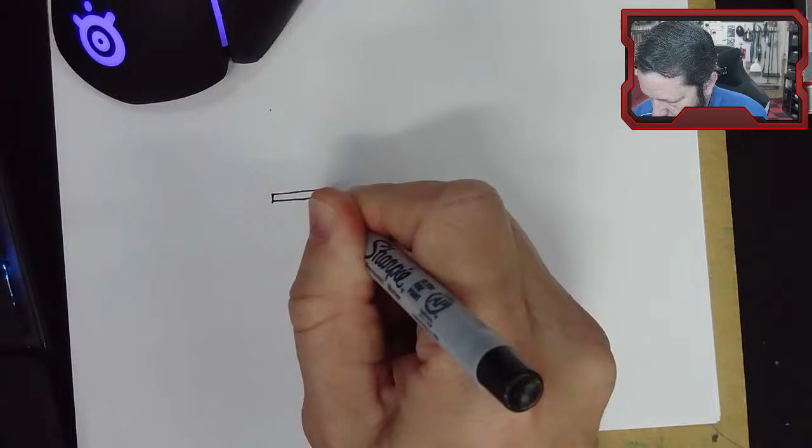So this is the bed down here. Instead of building it like this, where it has to have the support material all in here, if you can, just build it like this. So now each printer is going to have a different angle right here that it's capable of doing. In general, if you're unsure, a safe angle is 45 degrees.

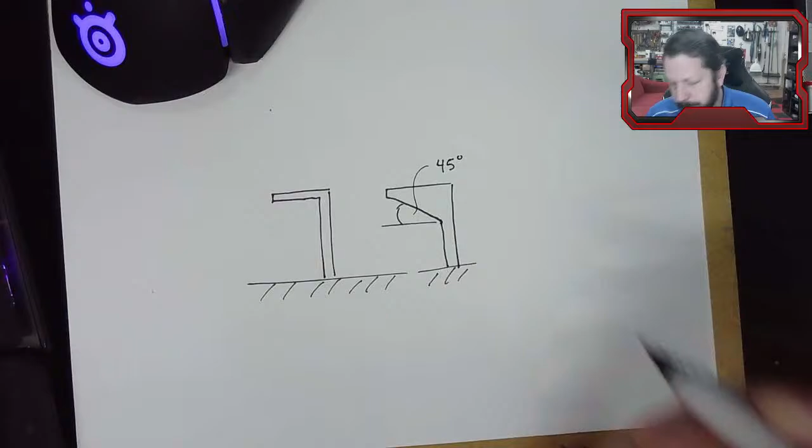But some printers can print overhangs at 60 degrees. Well, this angle would be more like 30 degrees or 20 degrees even. Obviously, this one, when it goes to print this layer here, there's nothing to support it at all. But a safe angle here is 45 degrees. And if you've done the test on your printer to see what your printer is capable of, then you may be able to make this more shallow.

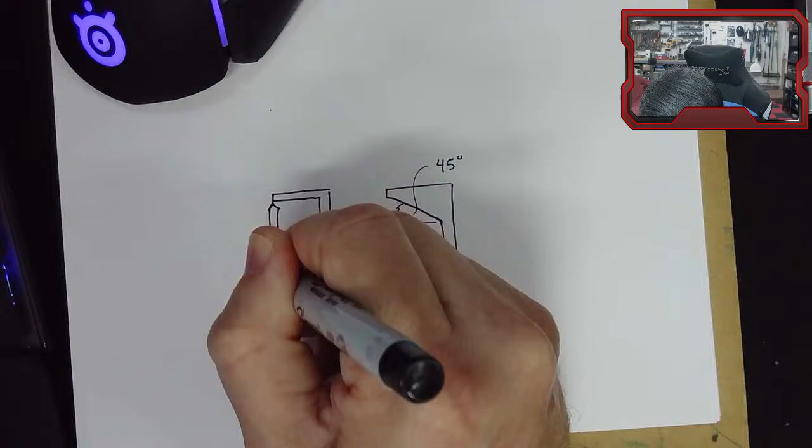You probably won't ever get it completely horizontal, except that if you need completely horizontal, you can go in, build in a little sacrificial piece over here, and when the printer gets to this level, it will bridge across here. So your printer can print in mid-air as long as it has a start point to start from and an end point to land on. It can actually bridge across there.

When you're printing the benchy, the little cabin is one place to look to see how well your printer bridges, because it's got the square window in the front of it. And across the top of that, it has to bridge from one post on the left to the post on the right side, and it's doing the same kind of thing here. So that's the thing on your benchy you can look at. If you've gotten one printed, you can look at it and see, is it making a good bridge here?

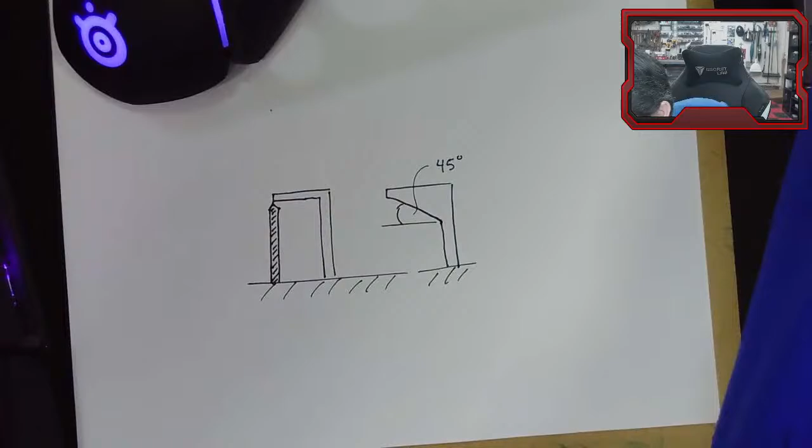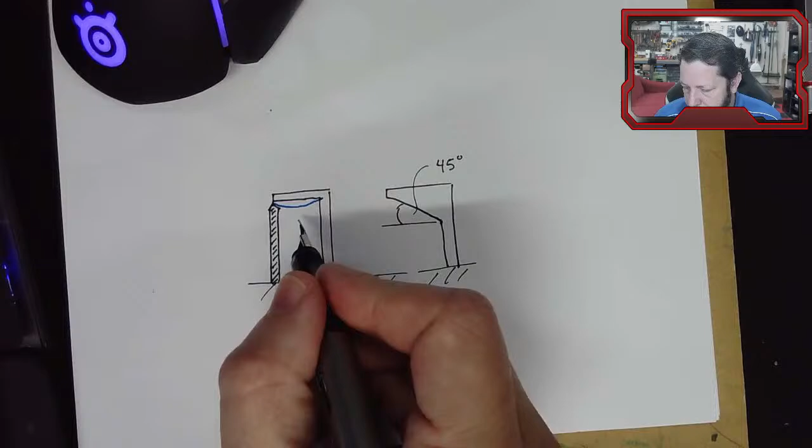If it's not making a good bridge, you'll have layers that kind of droop here when it goes to print them. And so if you have these drooping layers, then that's maybe a cooling issue. And there are bridge settings in your slicer, like how fast it goes across there and that sort of thing. But generally, is your layer cooling fan cooling this material fast enough so that it more or less solidifies in place as it gets across there? So those are some things to think about as you're designing this part: these overhangs and what your printer is capable of doing.

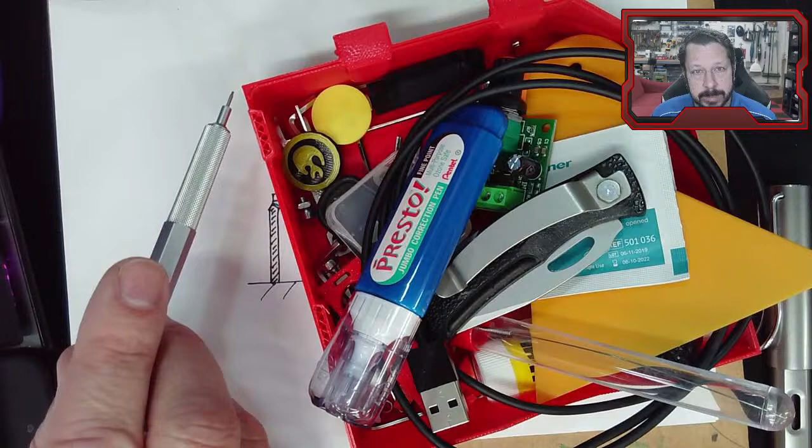General design principles still apply, like fillets. Anytime you have a corner, like this actually does have a fillet in it. So you can see right here, there's a fillet on here. Now, if I didn't need this to be a sharp corner, I would have actually filleted the outside, not because it needs a stress reduction there. Fillets are generally used to reduce stress, right? But because as this printer's coming around, instead of making a hard turn where one axis has to completely stop and another axis has to start moving, it transitions. And so if you can make these smoother transitions, you'll get smoother prints in the end.

If I have to stop and go in another direction, you're going to get a little shaking in your print, and you'll get some waves in the wall of the print. So if you don't have to do that, then design it with curves so that you're telling the printer, hey, make a transition here, don't stop and then move in another direction.

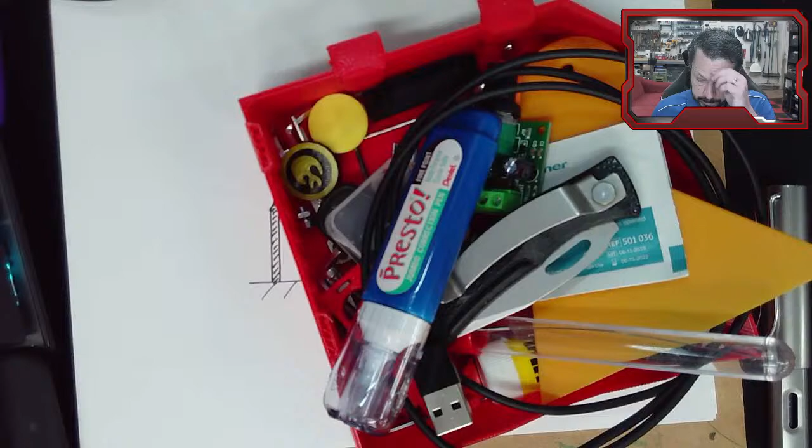In general, if you're using a fillet radius to reduce a stress concentration somewhere, like this little angle right here, this sharp angle would be a really high stress concentration. So in general, the radius here needs to equal this wall thickness. So whatever that is would be the radius of that fillet. It's getting all cluttery there, but that's just a general guideline.

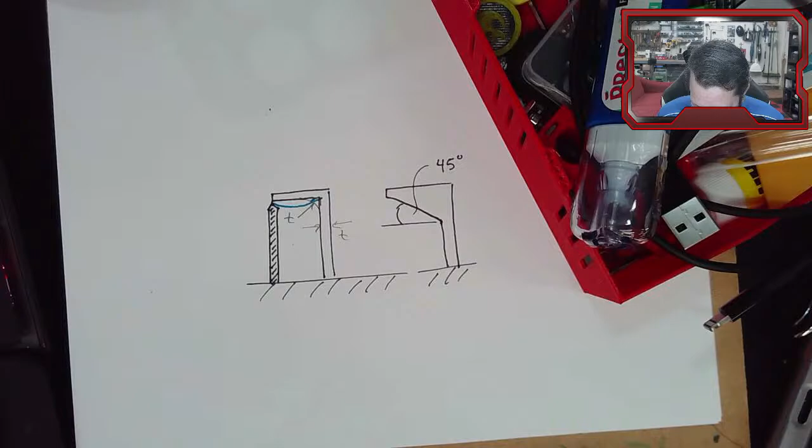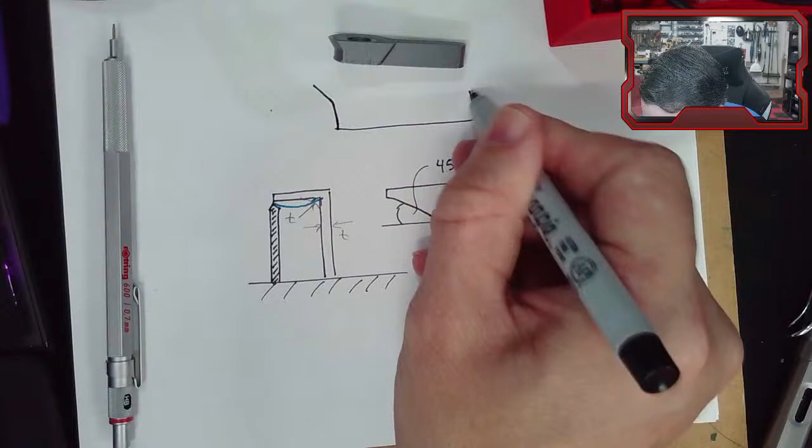We talked about bridging. Obviously, you've got to get the part to stick. We talked about elephant's foot. I don't know if I drew a picture, and maybe you didn't understand, but when I was talking about this part and the elephant's foot down here, what I mean is, I've got this shape. I want it to be kind of like this, right? Oh, well, I didn't make those line up. We'll make it a new part.

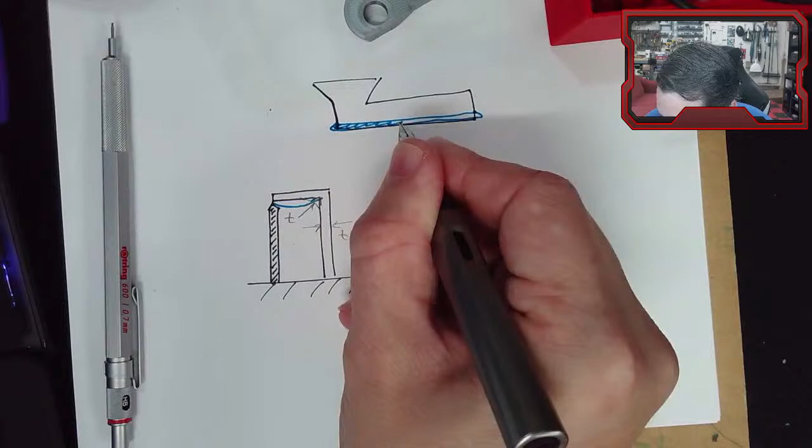I want it like this, but what actually happens is when I'm printing this first layer, it's squishing it out bigger, and so that first layer or two end up thicker than what I wanted. So this part over here and this part over here are outside of the dimensions that I actually intended for it to be. That's the elephant's foot. And we talked about how you could cure that by raising your z-axis a little bit. You could build this part this way.

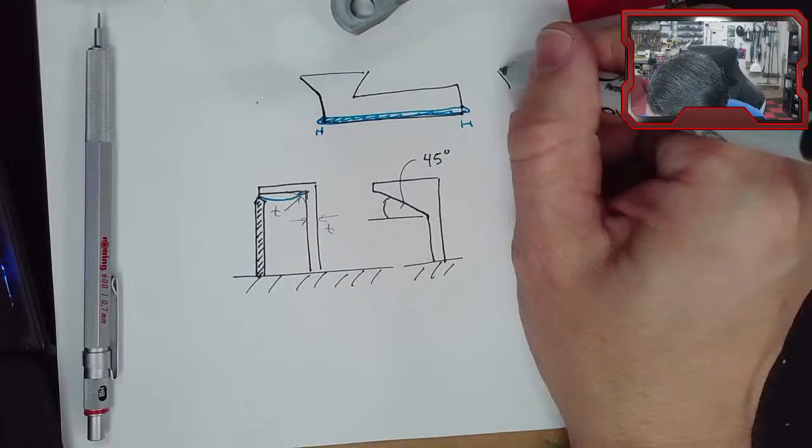So you just put a chamfer. Oh, I've got too much stuff in the way now. Chamfer in your part itself so that when it got squished, it basically squished it back out to the size you wanted it to be. So when it prints it and squishes it, it's like this now. And it's the size you want it.

You can file it off later. There's a lot of different ways you can deal with it. You can do the horizontal expansion to shrink that first layer in. Or you can do the initial layer horizontal expansion to shrink the layer in. You wouldn't necessarily want to shrink the whole part.

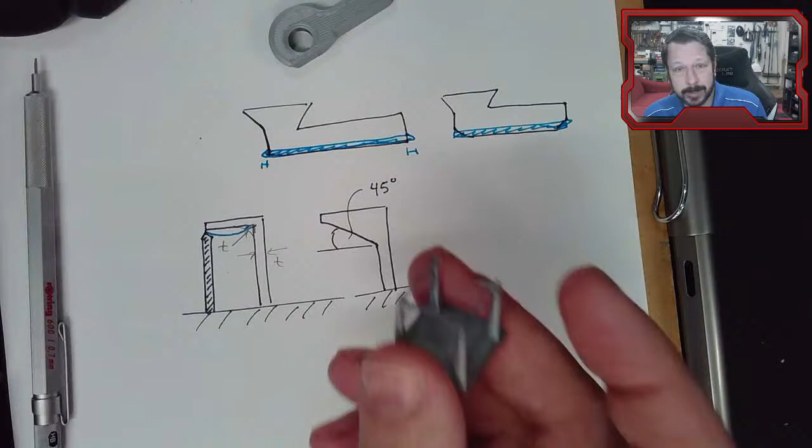With this, if you have lots of spires, so little peaks like this, obviously retraction is going to be an issue there. This one is intentionally set wrong, but if you have a part like the Benchy, the little smokestack on the top of the Benchy is good for measuring how well your cooling is working. So if you just can't get it to work, what you can do is, when you're building the part, so here's the part you want.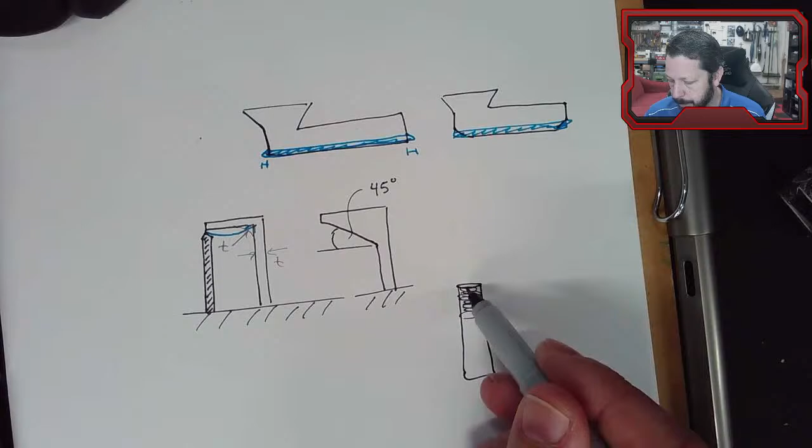You want this one, and it's going to have this relatively thin, tall structure, and it's going to be hard to cool this because it's just these little short layers. It doesn't take very long to print them, and so it stacks hot filament on top of still hot filament that it printed previously. And so it's going to be kind of warped sometimes if you don't have good cooling on this part. So some things you can do, you can try to improve your cooling.

I think I showed on Discord, I printed a little cooling duct to add to mine to replace, I don't know what I even did with the old one. Here it is. Here's the old one. And I printed one off of Thingiverse for the Ender 3 that directs the cooling from that layer fan more directly onto the part, so you can try that.

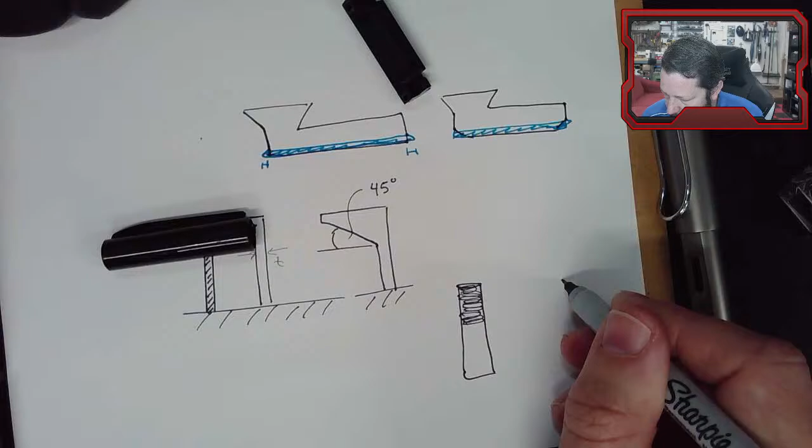Another thing, if you just can't make it work, is just go over here to the side of your part and print something that you don't need. Print another one of these, maybe you need 2 of them, or print something that's just a sacrifice, so that as your printer is printing, it prints over here, and then it has to go all the way over here and print something.

That lets this have enough time to, not dry, but cool down, so that by the time the printer gets back over here to print the next layer on top of it, this layer is more solid. It's not still molten. So making the print head move away and do something else for a while gives this time to actually cool down. So sometimes printing 2 of the same parts will actually help when you're trying to print these skinnier pieces that are going to have really short layer times.

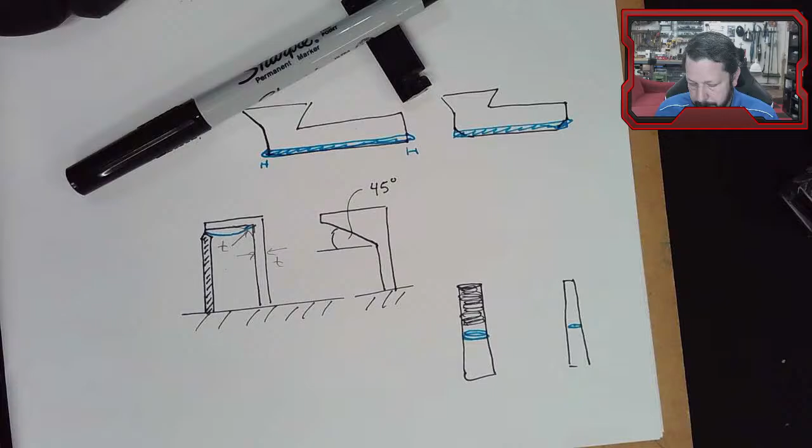In Cura, there is a minimum layer time setting. Let's see if I can find it. I think it's just called minimum layer time. Oops, that's not Cura. There's Cura. Let's see. Minimum. There it is, in cooling, minimum layer time. So mine is set to 10 seconds, although I don't think it ever actually takes 10 seconds to print.

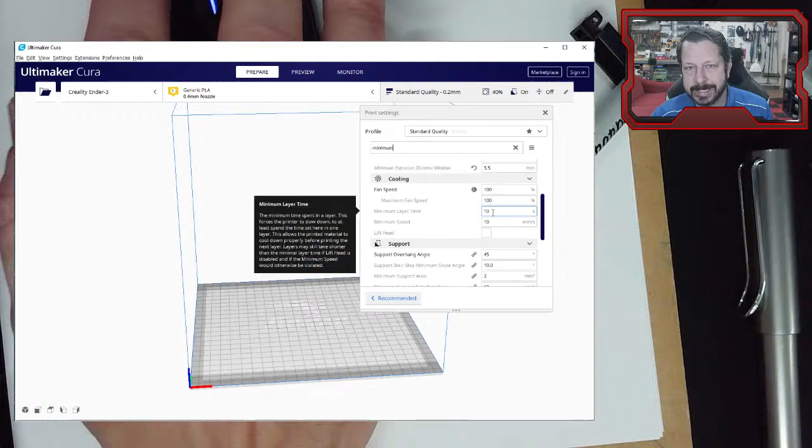Well, the minimum speed, I guess, these two probably work together. So it will only slow down to 10 millimeters per second, but that might override the fact that it takes 10 seconds to print this layer. So you can mess with these two also to get a similar effect, where the goal is to let the previous layer cool before you put new filament on top of that for PLA.

Let's see, what else can you do? We might be getting close to the end of all the things I was thinking of. Yeah, we talked about that.

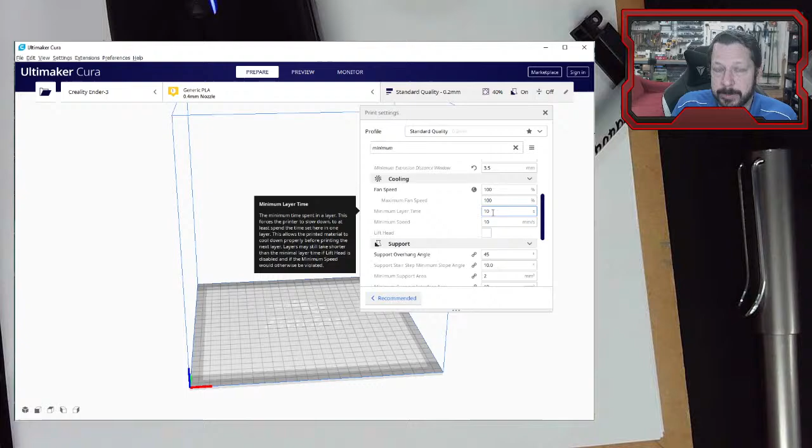Oh, well, here's some obvious things that maybe you don't even think about. You get to thinking, hey, I'm going to print this part, and it's going to be great. I'm just going to hit print on the printer, and it's fine. And that's one way to look at it, but don't be locked into thinking every feature of your part has to be printed. If you need a really long piece like this, maybe it's better not to print that, but to print a hole to receive a dowel, a styrene dowel or a wooden dowel that's that shape.

For one thing, really thin printed pieces like this are going to break easily, just because there's not a lot of layer surface area between the layers to hold them together. So don't get locked into thinking that everything has to be 3D printed. Don't forget that you can take other materials. Maybe this needs to be a steel rod, and instead of printing the tower here, you print a hole to put the steel rod in that takes the place of the tower.

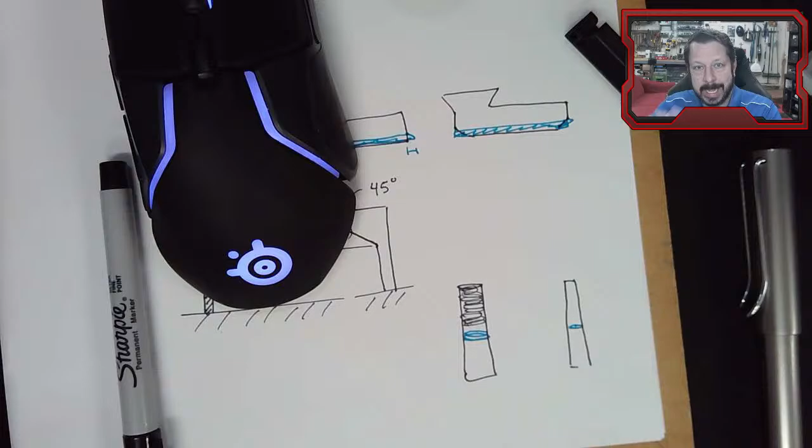Use fasteners. So you've got all kinds of nuts and bolts and screws and washers that you can use to hold things together. Don't think you have to print the entire thing as one part, but you can have an assembly. That's also better. If I were trying to print this, first of all, I'd have to have a really big printer to fit it all in there.

But what if this happened again? This piece by itself was 12 hours of printing time. So if I do have to reprint it, that's only 12 hours. But if it's the entire thing as one big print, then how long do I have to print a new one of those? So it is nice to be able to assemble it and just redo the parts you need to redo versus the whole thing going bad.

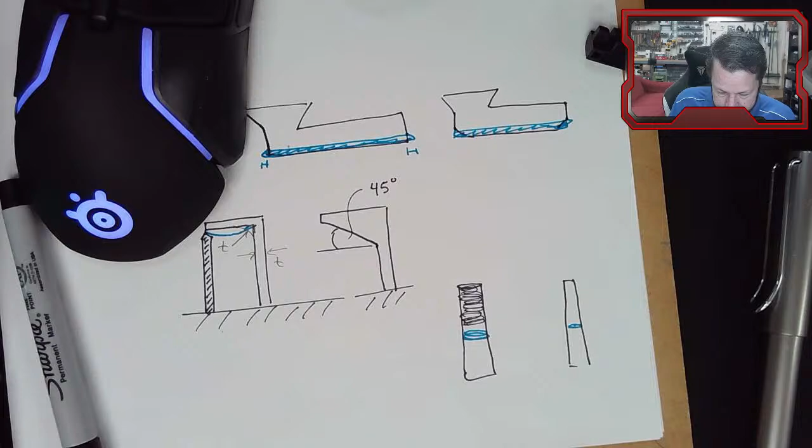And I already mentioned it, but do think about printing orientation for strength and for the features you're trying to preserve. Like these holes, I think you can tell, they're not perfectly round. This part, you can see the layers. This part was printed on its end, and these holes are where the tuning pegs are going to go. They're not perfect circles. They're a little bit oblong because instead of printing circles, it printed a bunch of rectangles on top of each other to create something that looks like a circle.

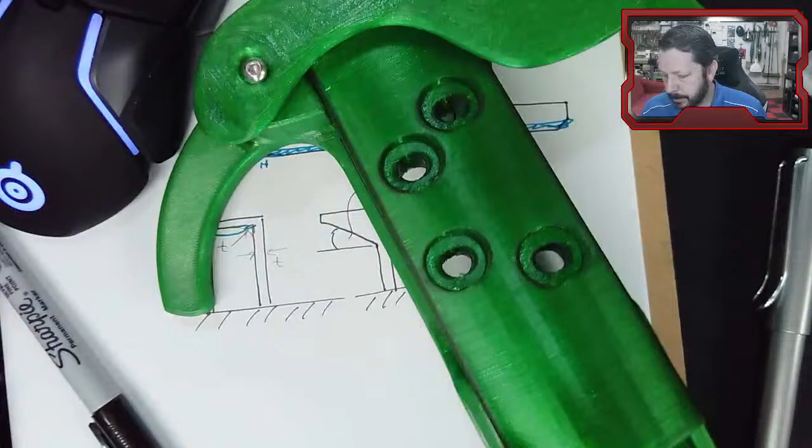Now there's enough slop in these that I'll be able to put the tuning pegs in here. But if it mattered that it was a perfect circle, like this hole down here does matter, then this would not have been a good orientation to print these. So there's a lot of different little things to think about when you're trying to print something for its purpose. You're going to design it for the purpose of printing it.

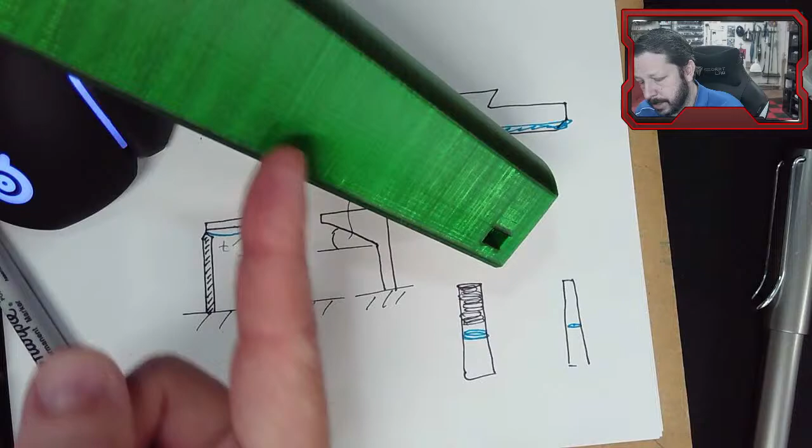Think about the strength of the layers. In these parts, the layers are stacked on top of each other here. So it's really strong in compression this way because I'm just trying to push layers together. It's kind of weak in shear though. The layers themselves are easier to debond. And so this part will not be as strong in shear or bending. Bending has a shear component to it and a tension and a compression component. So it's not going to be as strong there.

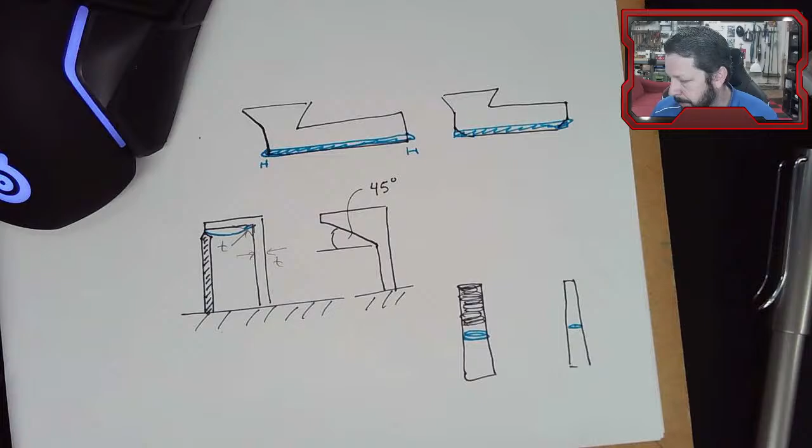That's also part of why it has this truss rod through the middle of it to reinforce all of that. That happens on guitars. I assume violins have a similar thing to stiffen the neck also. But think about the strength of the orientation of the layers that you're going to print. Are they going to be strong in the direction that the force is going to be applied when you actually put this thing in service?

I think that's a good overview. I was going to go into Tinkercad. We did go into Tinkercad a little bit. I was going to show some more things there, but I think we'll save that. I'll jump over to Zoom in case anybody has some last minute questions.